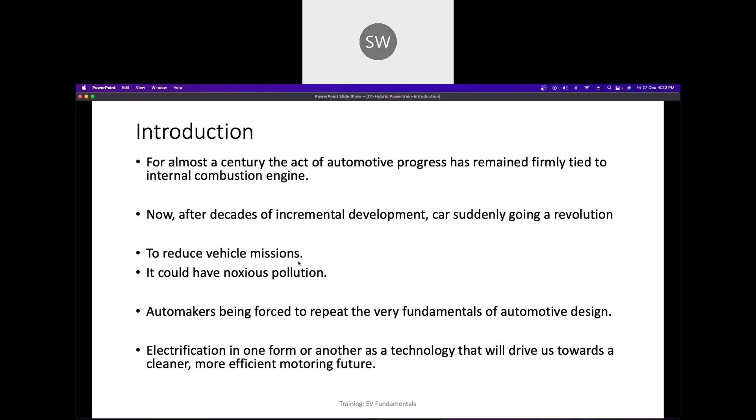We all know Tesla's full electric vehicle solutions - a major player in the EV market, demonstrating the advantages of full electrification with high performance EVs like Model S or Model 3. With software solutions like AI and even quantum computing, there's a bright future for all these technologies and cutting-edge things.

Speaking about electric cars, I've tried to cover vehicles already in the Indian market, so we have at least a listing in mind to correlate what and how these things are internally different. Our main focus is hybrid powertrain, but before that, let's have a recapitulation and collect whatever fundamentals are essential to understand it.

These EVs have gained significant traction due to their environmentally friendly and cost-effective nature, like Tata Tiago, Kia, and BYD Atto 3. Across the globe, BYD is becoming a global player and a top player in EV manufacturing, even trying to challenge Tesla's EV development. Because of China's battery making technologies and recent trends, many auto manufacturers across China have grown to the extent that they now dominate electric markets.

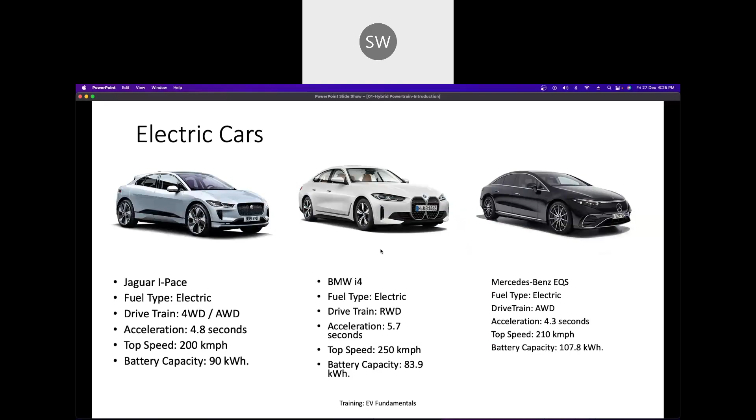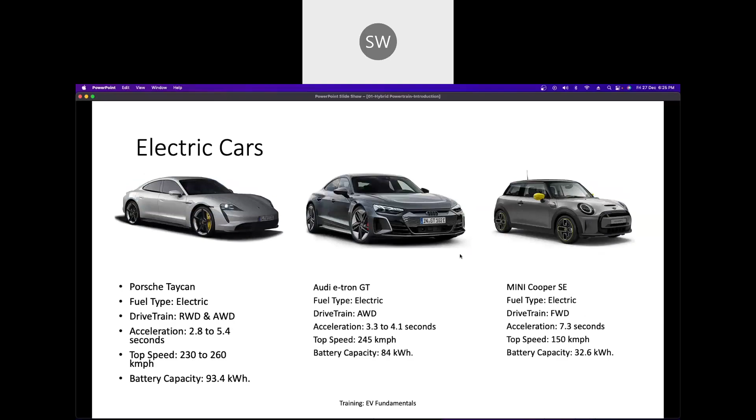Okay, so then BYD E6, so these are also available. Jaguar I-Pace, BMW i4, and Mercedes EQS. So all these are a list of electric vehicles. Some of these are into the sports segment, Porsche Taycan, and even Mini Cooper. Perhaps some of us already know these.

These are ranging from luxurious solutions to available, quite popular, even low price segments into Indian markets. If we talk about hybrid, and the term hybrid itself, so basically these are the things which we need to remember.

So EVs, or electrically chargeable vehicles, are powered fully or partially based on batteries, and they run completely on batteries - what we call pure electric vehicles. They have only one prime mover, which is basically a battery, and sometimes another version which we say is like a range extender. REX is the typical term given, for example BMW i3 REX, which is an example of a range-extended hybrid.

Apart from that, we know plug-in hybrid vehicles basically have gasoline engines serving as a backup power source once the electric battery is depleted. There are even algorithms currently changing this scenario and making it more profitable, and in recent years it will be very interesting and intriguing to understand which way this technology is going to change, and we are going to witness those changes.

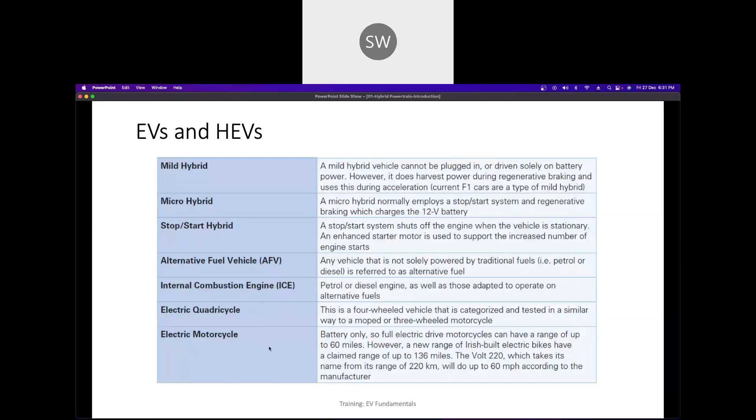So those are possible things with internal combustion engines, electric quadricycles, motorcycles and all. We have seen this trend in the market: whatever technologies earlier used to be for sports vehicles came into luxury vehicles, then those luxury vehicles became common passenger cars, and then it boiled down to motorcycles. So now these days we also see motorcycles basically driven by EVs and all.

About degree of electrification, electrification in vehicles varies from micro hybrids, or mild hybrid (MHEV), to completely electric ones. So in that range, like full hybrids, pure EVs and all, we can say these are the steps.

Micro hybrid typically offers start-stop functionalities at traffic signals and all, which depletes some fuel consumption rate, so that way relatively environmental friendly we can say. Full hybrid vehicles combine an electric motor and IC engine to work together for optimal performance and efficiency.

Even Mercedes-Benz offers C-class vehicles using this micro hybrid technology, wherein start-stop functionalities are featured to conserve fuel by turning off the engine when the car is in idle mode.

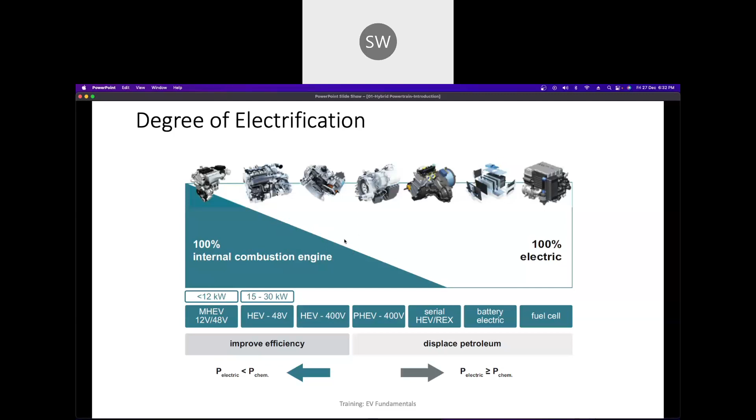These days artificial intelligence is also playing a crucial role into it, based on energy management systems. Hereafter once we speak about V2X and vehicle communication, it may be more intriguing to look for these technology clusters and how they are providing solutions to it.

Earlier there were few vehicles from luxury segments as well as from Toyota manufacturers who catered solutions into this micro hybrid and mild hybrid segment. Then between 2000 to 2010 we had the Corolla or Camry and those kind of vehicles, wherein full hybrid technology was already established and giving good results and outcomes as expected towards energy conservation.

Then this trend started especially after the pandemic, or near before the pandemic, wherein plug-in hybrids became a topic of cutting-edge technology, and every country started to basically forecast like after 2035. That is the practice, and they are still going to follow it across Europe.

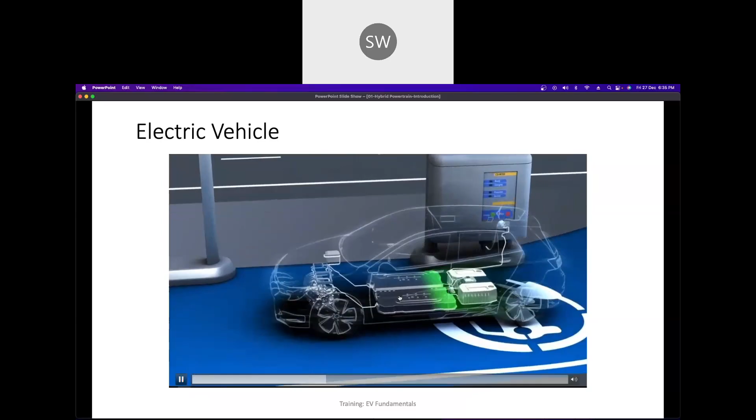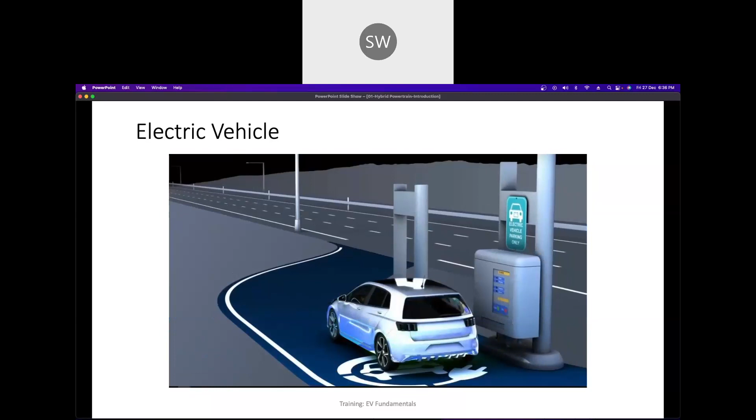Of course, a battery slowly will get charged, and that will drive the power towards traction motors, which will provide a traction force to the vehicle and be a prime mover, perhaps we can say. This white box may consist of range extenders as a blend of IC engine and all that. So this is what in general EV infrastructure, the charging station and all, would be.

This infrastructure development is still a problem even in developed countries like US and Europe. There the technology is still in question, and that's the reason it is getting prolonged.

Otherwise, yeah, we would have stuck to those deadlines of about 2030 for full EVs and all. So what are the additional offerings from electrification technology? Basically, it is silent mode and instant power delivery. Even in China, if you look at Xiaomi's and NIO's development, and even Dongfeng, the way they have catered solutions, especially instant power at the start, is amazing, and that's why it is still impressing people to go for EV technology.

And all this, of course, without any vibrations. So dazzling performance. That means reduced moving parts because there is no IC engine and its vibrating parts. Even though in range extenders there is, it will not hamper performance that much. So power will be less, I meant. So from micro hybrid to range extended ones, this is how the vehicles will be categorized: micro hybrid, mild, full, plug-in, and range extended plug-in electric. These two are pure electric EVs, what we say.

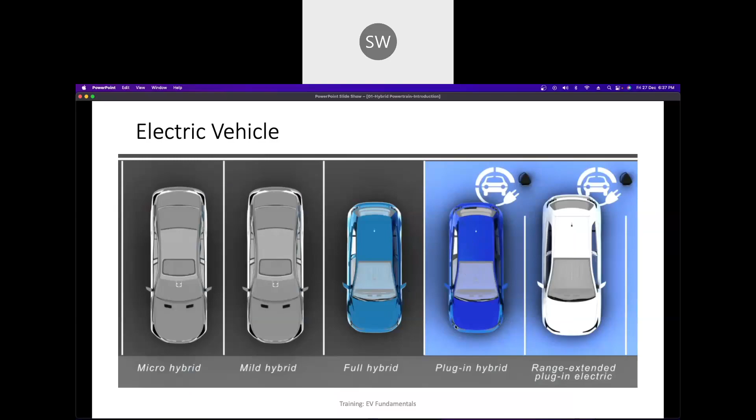So what functionalities do they offer? These are features: start-stop functionality. Of course, every segment offers that because we are discussing hybrids, and that's the term. It assists at the start, and the moment the vehicle is stopped at the signal, it assists again to generate sufficient torque at the beginning to move the vehicle. Okay, regenerative braking. That means some power is recovered from braking, which we otherwise lose in the form of heat. So instead of that, it is possible to recover that power.

In micro hybrid, it is possible. It's not promised by all manufacturers, but most of the manufacturers do it. And hereafter, from mild to pure EV, yes, it is there. Boost, especially during acceleration mode. For example, consider hilly terrain, wherein we need support or extra acceleration. That boost is not available in micro hybrid because of the battery structure and architecture of the micro hybrid vehicle. But for all others, it is possible.

Electric only mode is of course not possible till this particular segment. Full hybrid, yes, it is possible, but again, not promised by all full hybrid vehicles. Plug-in hybrids, yes, it is possible. Electric range, of course, no range, because pure electrification has not happened, and we are not considering the electric battery as the only prime mover here. Here it is possible, but only in a few segments.

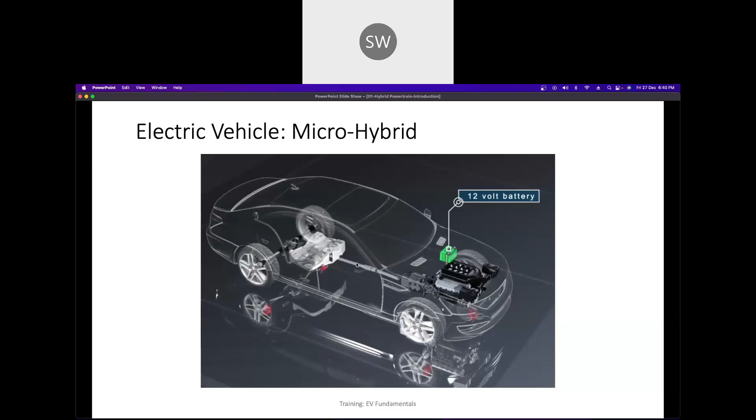They do not need any plug-ins. Their battery is charged during driving. There are a few evolving developments in this segment again. Every manufacturer has to segment out its vehicles so that it can play a crucial role in the market.

For mild hybrids, there would be the additional difference of a 48-volt battery architecture along with 12 volt. Usually, a mild hybrid will keep both batteries. They preserve the 12-volt battery architecture, and in addition provide this 48 volt. But it's considered to be near 60 volts, which is considered the danger point and needs to be catered differently. So there are safety protocols across the globe that every auto manufacturer has to follow.

So this is powered by a 48-volt battery system to assist the IC engine. But unlike full hybrids, they cannot operate solely in electric mode. That's again a difference between this and full hybrid.

Okay, so here the 48-volt battery is the difference between micro and mild, and here the battery as the prime mover is not possible in mild hybrid, which is possible in full hybrid. So again, they primarily use electric power for starting and accelerating, so that push is possible. We can see fuel consumption gains of 8 to 15%. That is what most of the manufacturers promise.

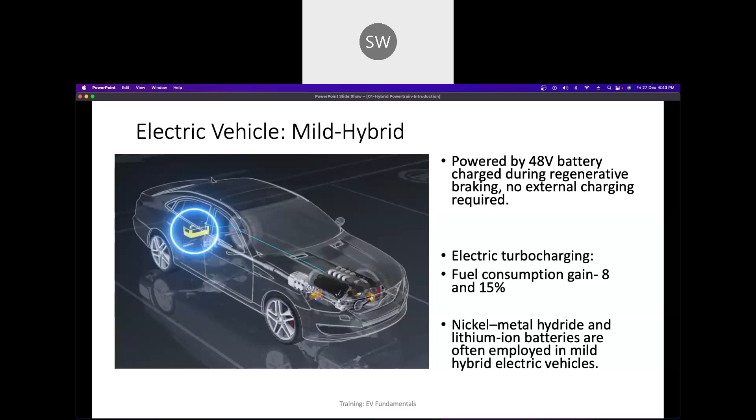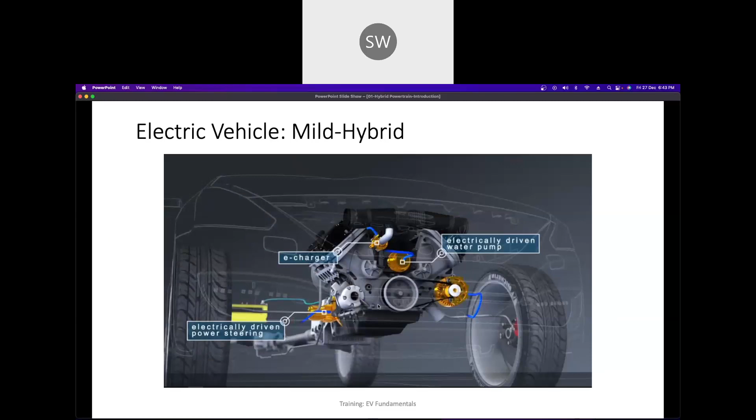So these are supportive functionalities, e-charger. Of course, what I was talking about, the electrically driven water pump. This system is basically for the cooler and all. Then there would be assistance, especially push support technology, and again power steering. So these functionalities will be taken care of by the battery in mild hybrid vehicles, not driven by IC engines as in conventional vehicles. The yellow highlighted parts are driven or powered by batteries rather than the IC engine. Okay, so that is how hybrid and degree of hybrid, I guess, we can understand now.

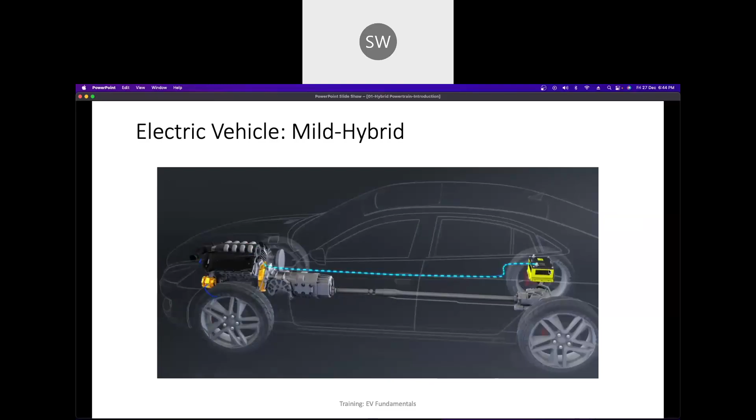So here we can see a torque converter. The pump pumps the fluid into the torque converter. This is considered to be a complex device. I can understand, because it's not so intuitive, and one needs to imagine the fluid flow and all. It's quite an intricate device, I would say. But in mild hybrid it is there, and the oil into it is now taken care of by the battery, no more power required from the IC engine.

Full hybrid, of course, has a small battery architecture. Again, what small means, and all these norms, differ from manufacturer to manufacturer. Toyota Highlander, if you have seen that vehicle, is a hybrid. Even Prius or Camry, these are full hybrid vehicles, well established in the market. And there are a few from the luxury segments like Mercedes and BMW as well. This is what in general the technology will look like.

So it will have two motor sets, MG1 and MG2 in short form, which we will be looking at in the second presentation, all the components. Full hybrid has an IC engine as well as battery packs, and since it has the capability to power the vehicle purely on battery, it requires electric motors. In between these two motors sits a transmission, which I'll be sharing and discussing.

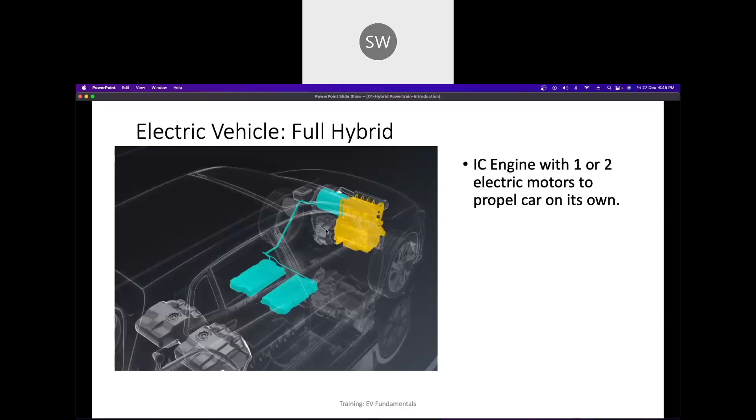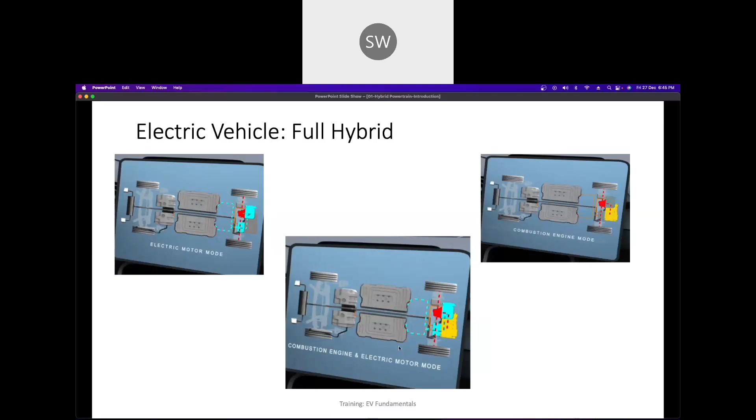So these are different modes, combustion engine and electric. Power can be taken from both sources combined, or either of the sources: pure EV, combination, or pure IC engine. All these three modes are possible in full hybrid vehicles. So of course, fuel savings, emission norms and all. It's like 20 to 50% efficiency gains over standard petrol and diesel conventional vehicles.

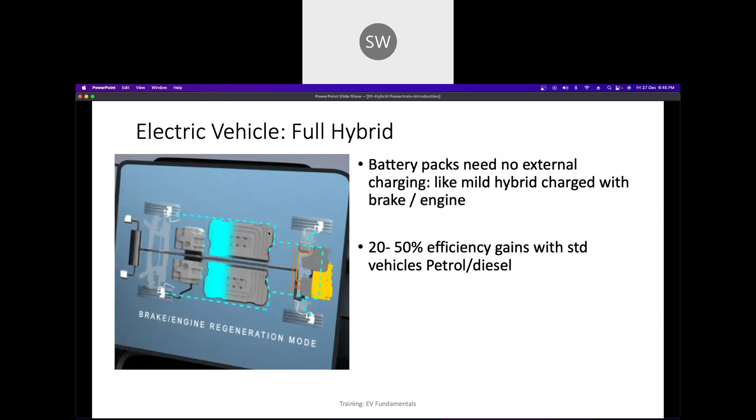So here comes plug-in hybrid, which requires extra charging from an outside source because of the power or voltage depletion in the battery packs. It can operate solely on electric power for short distances. They also have gasoline engines to extend their range, which we call a range extender. So that option is there.

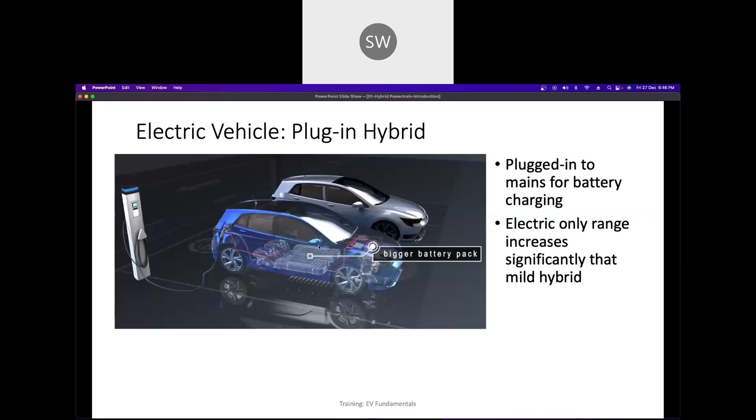But some vehicles have no ICE engine, like Tata Nexon, perhaps, you know. That vehicle is pure EV, no internal combustion engine as such. But range extended, we know the consequences of pure EVs and plug-in hybrids. Here the additional power can be sourced from the internal combustion engine. That's why the term is range extender.

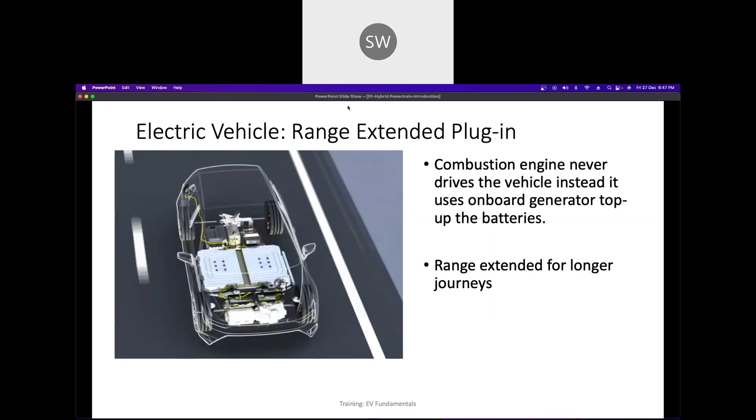So this is what the internal combustion engine and its architecture would be. There will be a lot of control units and processors or microcontrollers communicating with the mainframe ECU, for each and every technology.

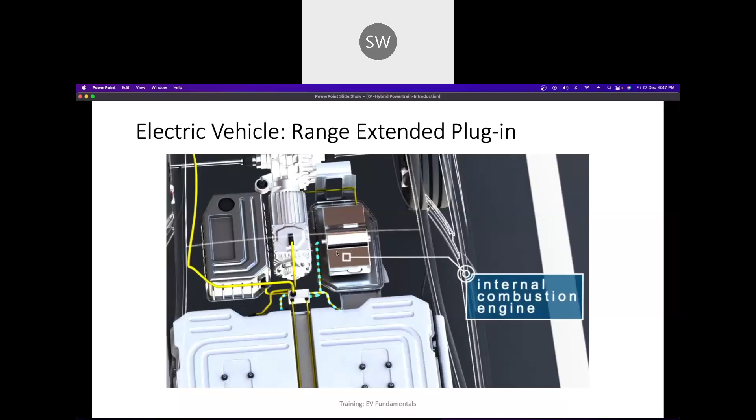I would say there are a lot of engineers who are working on the logics, and you'll be surprised, we are even getting customer queries on Audis and BMWs and even Rolls Royce. So in peculiar functions, though almost all operations are addressed, there will be some scenarios and test cases wherein, however sound you make your technology, there will still be quite a bit of room to develop these parts. So in combination, it would be very tricky.

So these are terms which are used in degree of electrification. Apart from these fuels, we are not going to go into the chemistry involved in those fuels. But this is, entirely from the mechanical perspective or architecture-wise, how the hybrids would look. There is something called parallel hybrid technology, serial hybrid technology, and power split. I know Toyota has its own peculiar power split vehicle. Each manufacturer has its own trends towards hybrid power generation.

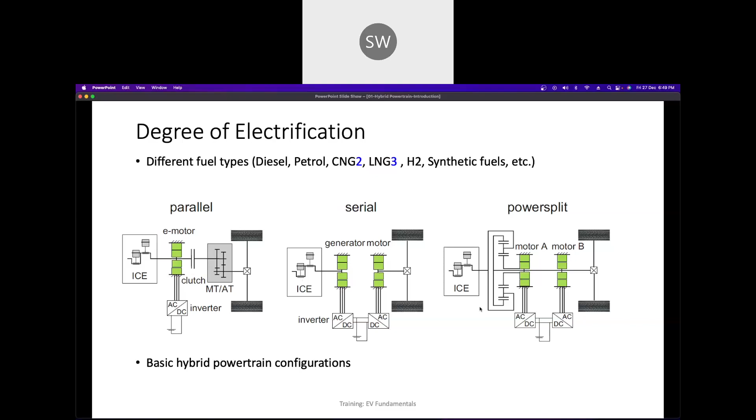So either purely based on motors, or IC engine as a support, or the IC engine is driving a generator motor, as you can see here, and then from that an AC/DC converter. We will be discussing this part next. So that is what a serial hybrid means: these two are connected in series. And power split basically means power from the IC engine as well as from each of the motors is possible, in short. And this is the parallel hybrid architecture.

Again, there are few options. Usually the degree of parallelization has these terms: P0, P1, P2, P2.5, P3, and P4. That's why it's very tricky to speak about vehicles and what kind of technology they are using. P0 is basically integrated at the front end, via a belt, so power is given just at start and stop. P1 is the E drive power from the battery or the motor, supporting the engine and transmission in between.

P2 is also that, but after the clutch plate. That's the difference. P2.5 is at the transmission inlet side, so it can push it. P3 is another level of hybridization, integrated with the transmission, meaning battery power is integrated with the transmission. And P4 is for four-wheel or all-wheel drives, where in addition the axle is supported, so the rear wheels are also supported.

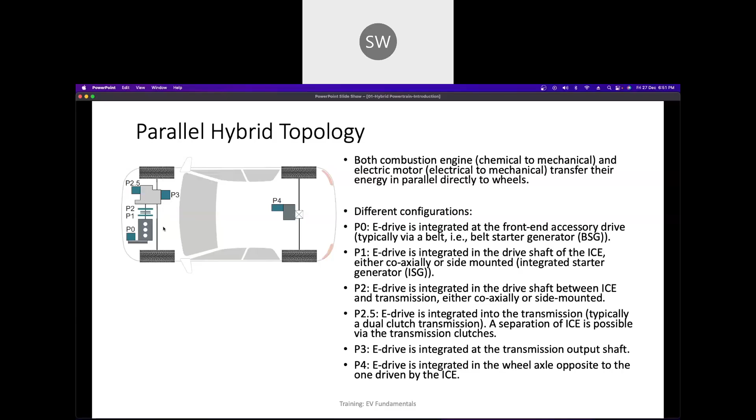But perhaps almost every one of us knows the most common segment is front-driven wheels. That is the common architecture most passenger cars use because of fewer components, it's easy to control, and to keep track of oversteering and understeering, if you know the terms. Apart from that, this is about serial hybrid technology and the terms related to it. It's the same part we spoke about earlier in the introduction: power split technology.

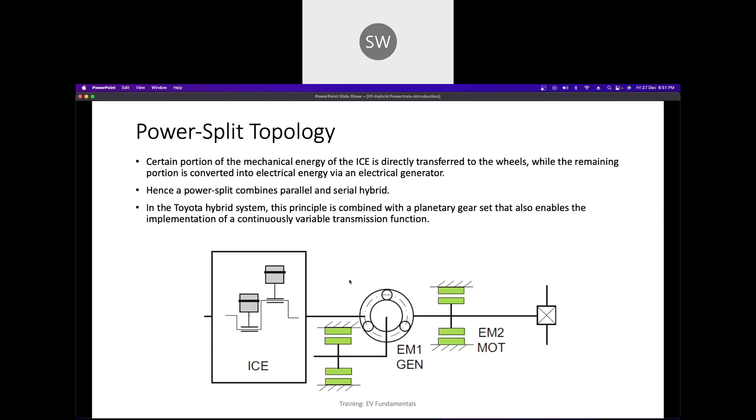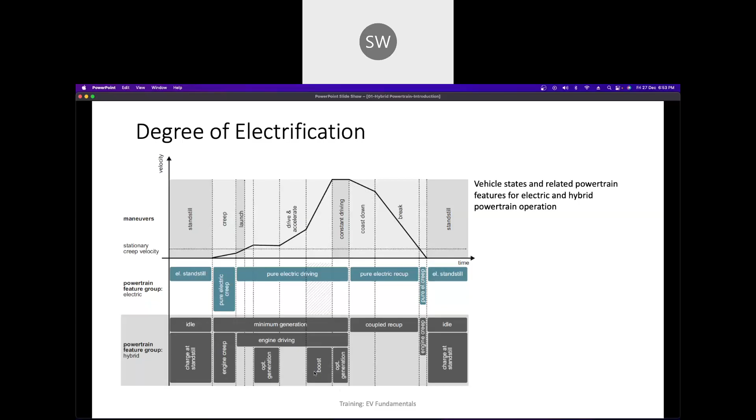Then coast down, so basically we are decelerating, but the vehicle, because of its inertia, is running. And this is like brake, so we are reducing the speed. And then standstill means again we are at stop. So these functionalities, how basically in different segments of hybrid vehicles they are supported, that is what is listed.

Yeah, so that was the first part of our presentation. I would go for the second part, which is more into components and all. So just let me share that part again. So this is from the perspective of the components which are present in the hybrid powertrain. So I can skip this.

So we already have discussed the benefits of hybridization of vehicles, fuel consumption, acceleration, and also this part we have discussed. Maybe Toyota Prius we can speak about as an example, which became synonymous with hybrid technology, particularly in cities like Tokyo, which are well developed, where efficiency and reduced emissions are key. So it has grown popularity in emerging markets. Even in India we know this technology is coming up.

Then there are predictive maintenance systems. Perhaps hereafter some AI-driven technologies will definitely come into it, which will work towards efficient maintenance, efficient repairs and all. Even suggestions would be done through some AI techniques. Of course, there are a few models which need to be trained on that, but yeah, it will work.

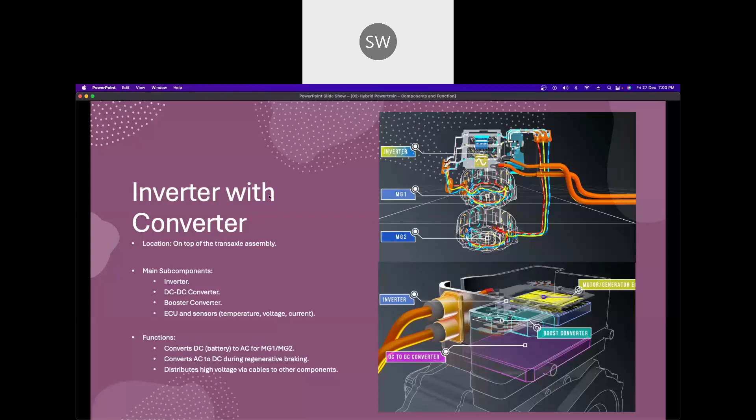For these DC-DC converters, as I spoke about, it steps the high voltage DC down to the standard 12 volt system, which is demonstrated here, from the battery. That is needed because each and every electronic component has some threshold and working voltage range where it is most efficient. So that is one of the goals of this DC-DC converter.

This maintains full operational voltage and current to the 12 volt system, including charging the auxiliary 12 volt battery, as typically there is no conventional alternator installed in full hybrid electric vehicles. This DC-DC charger is rated to a certain amperage and output depending on the requirement of the electrical and low voltage consumers installed. It can also be combined with the converter assembly or installed directly onto high voltage battery packs.

Again, there would be various sensors in the inverter and converter assembly monitoring atmospheric pressure, temperatures, and powertrain components. So overall, it steps down high voltage DC to the 12 volt system, powering low voltage systems like lighting and infotainment. It even charges the auxiliary 12 volt battery, eliminating the need for an alternator in the hybrid. That is a crucial task which the DC-DC converter does.

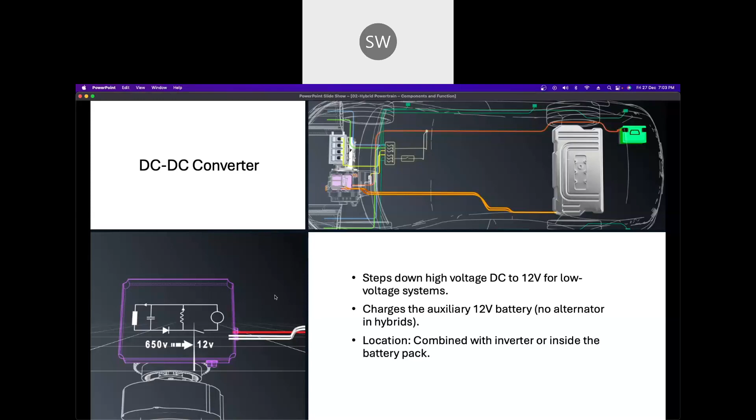Even for that DC-DC, basically... Swapnil sir, I think you are on mute. Kindly unmute. I don't know, somebody might have muted because of disturbance.

Sorry, I will cover this booster converter again. Basically, it steps up or steps down voltage as required, enhancing the hybrid system's adaptability. It maximizes the voltages of the MGs and manages battery charging during operation. The booster converter is connected to the inverter, and its main task is stepping up or boosting the normal high voltage from the high voltage battery pack to any voltage level up to the maximum high voltage rating predetermined by the manufacturer.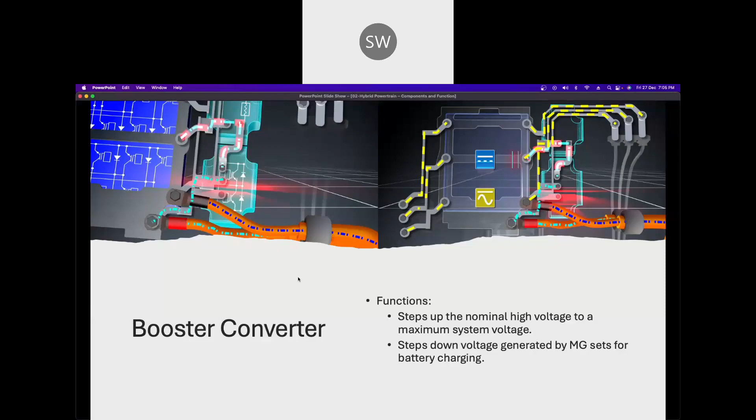That is when the powertrain system requires it, and the booster converter also steps down the high voltage generated by the motor generator MG sets to the nominal high voltage charging rate for the high voltage battery packs. So these are the two main functions of the booster converter, step up or step down. That's why the term is booster. About mechanical driving units, we are speaking about plug-in hybrids, so naturally there would be these components. But these days manufacturers choose wisely to optimize the number of components.

So the mechanical drive units basically use compound planetary gear set systems, to connect and disconnect the IC engine with the motor generator sets, MG1 and MG2, providing variable ratio and torque multiplication, depending on the gear ratios. This is a peculiarity of each manufacturer as to which ratios can be achieved. For our ZF part, I know only 4 planetary gear sets are able to make 8 combinations of gear, so 8-speed gear train, based on different combinations we can generate.

That's why people prefer to get attached with this, and their linearity as well, easy to adapt with the rotations, and that capability also enhances the power transmission part. So these are basically used in hybrid electric vehicles, and that of course varies in design as per manufacturer.

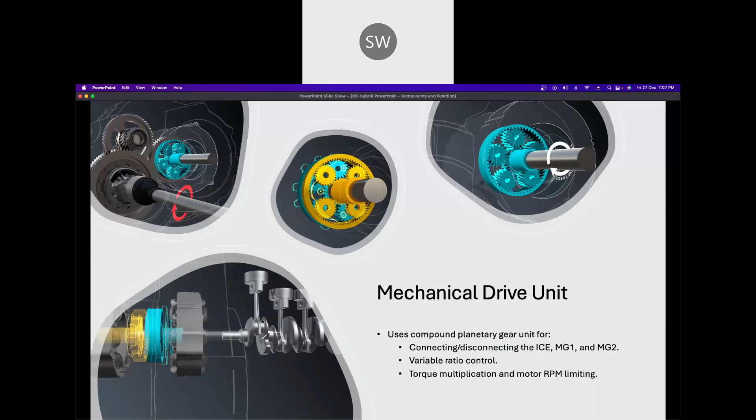That is a primary part, one of the primary parts. It provides variable ratio as I've stated. The drive unit is also used for motor RPM limiting, so that if the power demand is less and the motor generator set is already transferring higher RPM, step down is also possible with this gear ratio, controlled by the main ECU for the hybrid electric powertrain. That is comprehensively managed and controlled by the hybrid powertrain systems. The ECU gets inputs from different sensors and other ECUs in communication, monitors requests and calculates the required torque and power, and that's how torque multiplication and limiting will be taken care of.

About these motor generator sets 1 and 2 - there are various configurations of electric motors and generators in use by hybrid electric vehicle manufacturers, quite vast. Typically there would be MGs, motor generator components, used to provide mechanical rotational forces as well as to generate the voltage and current needed to recharge the high voltage battery packs. The two main components that make up these units are the wire wound stator part and the rotor part, and there are different types into it.

With a typical two motor generator powertrain, MG1 is used as the main high voltage generating device as well as starting the internal combustion engine - that is the goal of MG1 usually. The second, MG2, is the main motive force driver for the drive wheels. It is powered either by MG1 or by the high voltage battery packs via inverter and converter. With the assembly, it can be used for regenerative braking, by turning into a generator when the driver begins the vehicle's braking action. That is one of the parts usually handled by MG2 - so these are two different devices.

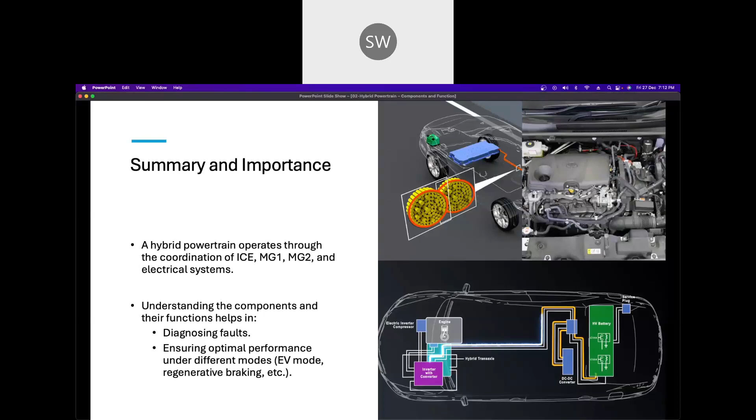Let us talk about different system modes now so we can understand it in more depth. It would be intriguing to understand the different modes. Our hybrid powertrain caters to these different modes, and as the demand for electrified vehicles continues to rise, understanding these modes is essential, both from a designing perspective for the algorithms and from a learning perspective.

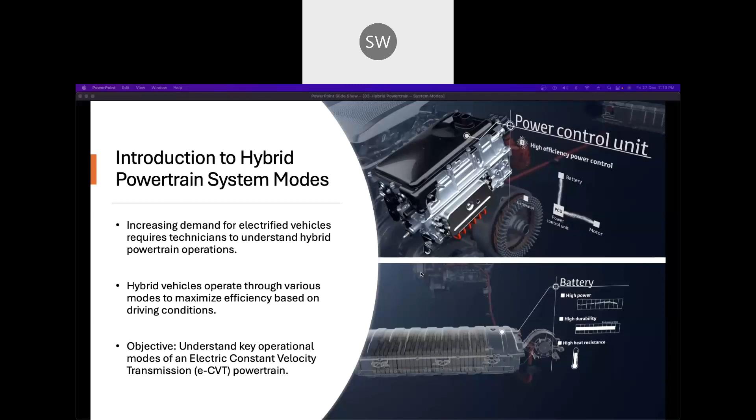Basically these vehicles operate through a series of modes to achieve maximum efficiency based on varying driving conditions. This will focus on how the electric constant velocity transmission, ECVT, plays a role in the powertrain, and is a central part of the vehicle architecture. These hybrid powertrains are adjusted based on driving needs, with more focus on fuel efficiency, and that is what we are going to address.

So for different modes, let us start with the easiest mode, which is light mode, standing start. So what exactly happens: at light load, when the vehicle is starting from standstill, the hybrid powertrain utilizes the electric motor MG2. Of course different manufacturers use different strategies, but conventionally most manufacturers do follow this.

MG2 is the sole driving force, so power flows from the high voltage battery to the inverter and then to MG2, and that is how it propels the vehicle. If torque demand increases, the internal combustion engine becomes activated through MG1, adding additional power to assist MG2. That is the basic idea for light load standing start conditions.

So the power flow is from high voltage battery to inverter to MG2 to compound gear set and to final drive, and then basically to the wheels.

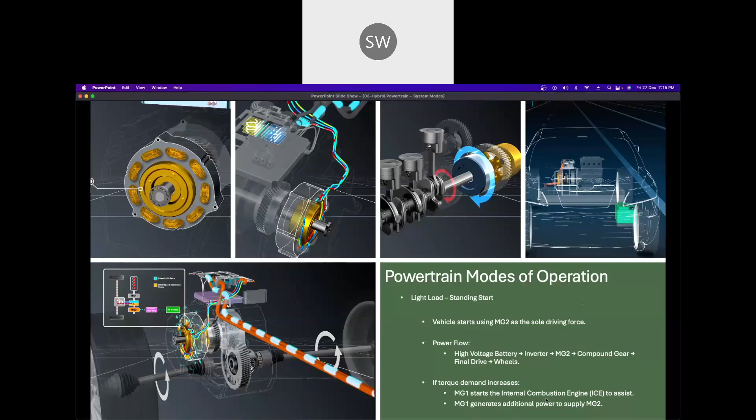Again with different conditions, if torque demand increases, there is a scale. MG1 starts the internal combustion engine to assist, and then MG1 generates additional power for MG2. So that is what light load constant standing start is.

Now this is the next phase, light constant load, but the speed is already there - vehicle traveling at medium speed driving. In this mode, the vehicle operates at medium speed with a constant load, such as cruising on highways with no hilly terrains, so it's at a constant rate with no slopes perhaps.

The IC engine provides torque to power the vehicle, while MG1 helps recharge the battery via the planetary gear set. That is the typical mode.

If the battery's state of charge, the SOC term you might have heard of in these workshops, is low, then MG1's RPM is increased to prioritize charging in that case.

So this is MG2, and MG1 would be here. Depending on the state of charge, it would try to optimize it. All these decisions need to be wisely considered while designing the codes and algorithms for decision-making in the ECUs and BMS systems, BMS ECUs and all - that is sometimes very challenging. So the power flow is from the IC engine to the planetary gear set and MG1.

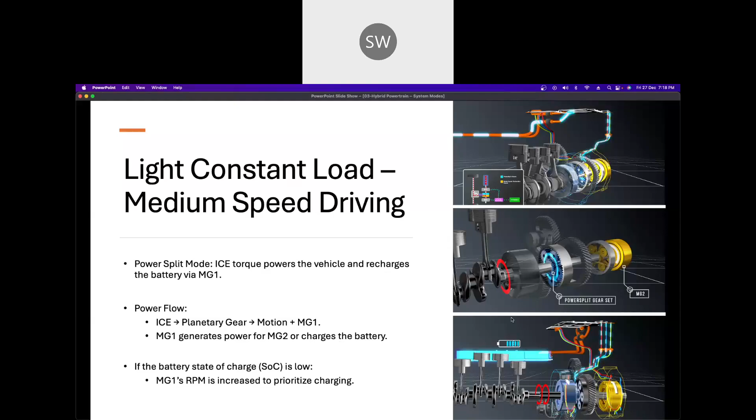Depending on the levels of ADAS, this behavior could be further changed. For high acceleration, which is a power demanding mode, when the vehicle requires rapid acceleration such as overtaking or sudden speed changes, the system enters heavy load mode. In this mode, MG2 operates at maximum output to provide rapid torque delivery. Priority is torque in this case, not charging of the battery.

Then the IC engine assists, engaging through the compound gear unit, while MG1 generates additional power for MG2 and maintains optimum performance. All this is driven through the control unit. This is essential for high performance driving situations where both speed and efficiency are crucial. This system ensures MG2 delivers maximum torque while minimizing reliance on the IC engine, to improve fuel efficiency further. That can be one of the scenarios.

Even the Porsche Panamera E-hybrid vehicle, since Porsche makes sports segment cars and is popular for that, utilizes this mode to deliver exceptional acceleration while maintaining fuel efficiency.

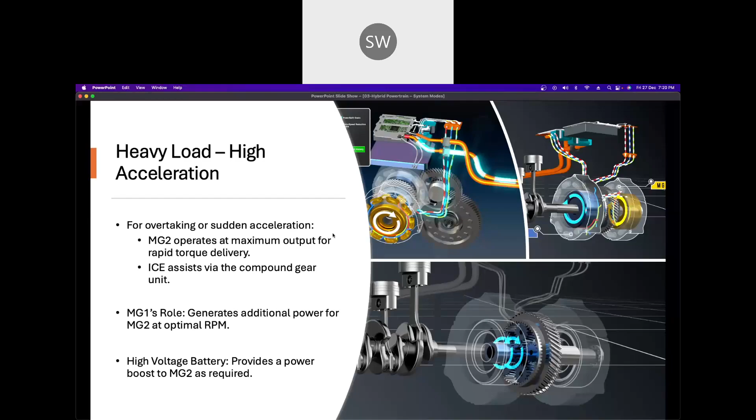Deceleration or regenerative braking mode of operation: during deceleration, the system enters regenerative braking mode. The IC engine turns off and the wheels transfer mechanical energy to MG2, which functions as a generator. This allows rapid battery charging, reduces wear on hydraulic brakes, and generates deceleration force. To prevent overspeeding of MG2 and the gear units, the IC engine may start to stabilize RPM, since in deceleration mode, to reduce traction force or transfer force to the wheels, it may come in between.

Reverse mode is also important, as sometimes more torque is required in this mode. In reverse mode, the system operates in reverse polarity through MG2, allowing the vehicle to move backward without requiring additional gearing. The IC engine remains off during reverse motion, and MG1 rotates freely without generating power. The Nissan Leaf uses a simple and efficient reversing mode mechanism to provide smooth backward motion without needing a separate reverse gear mechanism. That's one of the cutting edge technologies these vehicles use.

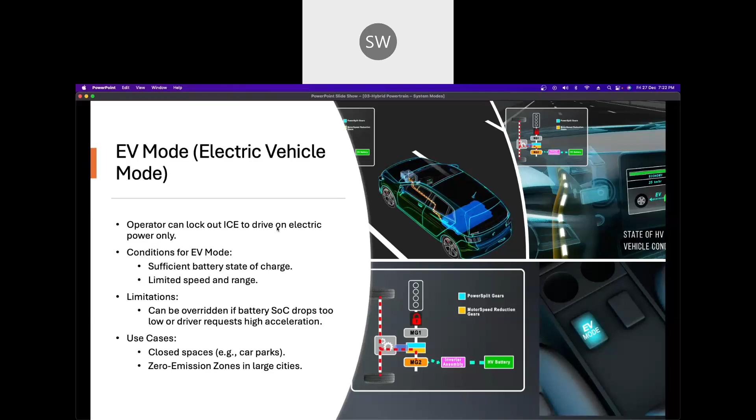So, summary of all the operations: we discussed hybrid powertrains which utilize various operational modes, optimizing energy use across different driving conditions, like high load, light load, constant load, heavy acceleration, regenerative braking, reverse mode, and EV mode. Each mode is designed to deliver the most efficient power contribution. These are typical use cases, broadly listed, though when we go for code generation, the system architecture design would be different.

So then there are a few mechanical challenges I would just quickly touch upon, which are essential for EVs, especially while handling the components and all. I don't want to go into much detail about that, but yeah,

hybrid vehicles, similar to traditional internal combustion engines, do have these components. So they are identical in most ways, but come with unique mechanical challenges that require special knowledge and diagnostic procedures, and again challenges from the integration of high voltage systems. That is also there, along with mechanical wear and tear, oil lubrication issues, and the overall complexity of the hybrid powertrain architecture, I would say. So these are basically the key challenges.

So speaking about safety considerations, I have already stated above 650 volts or 60 volts, whatever it comes, it has to be catered to with much more safety priority. So there would be separate standards followed for functional safety as well as user safety. It's top priority in hybrid vehicles, of course, due to the presence of live high voltage systems and powerful magnetic fields.

So even technicians are required to follow strict safety protocols to avoid exposure to dangerous voltage or electrical faults. So that is quite a challenging part for maintenance as well as the EV's life, or even these hybrid vehicles' life.

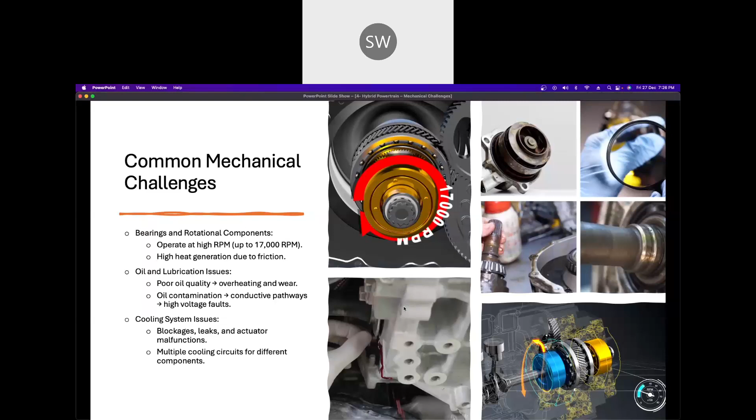From the lubrication side, they recommend going with only certified coolants and certified fluids because of the peculiarity in the component design. So proper lubrication in critical hybrid vehicles will ensure smooth operation and prevent mechanical failures. So that is also essential.

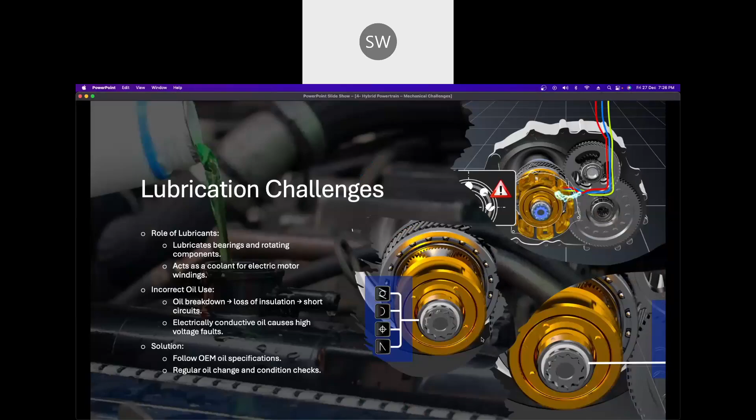For cooling systems, thermal management systems are there for multiple components, but of course those need to be triggered smartly, which can optimize the performance of the IC engine, electric motor, battery, inverter, and all. So those are also primary parts of these cooling systems.

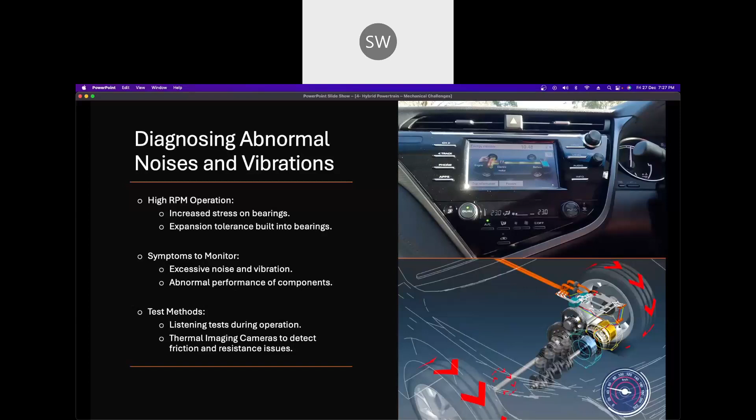Since we still have the IC engine and its rotating components, the noise and vibration analysis is also challenging in the presence of high electric and magnetic fields especially. So that is also one of the challenges, I would say, for vehicle design. For the high voltage component system, we spoke about specific accessories required from the maintenance perspective, like to prevent stray currents through bearings. So it's basically a very challenging part.

So these are the challenges which we are listing. Fault replication and test drive, that is also monitoring for noise, vibration, and performance issues. So these are also a bit challenging.

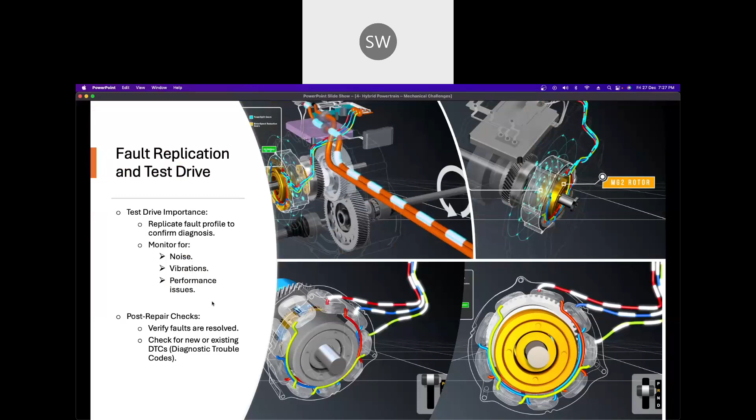So I will just quickly go through one of the important parts, maybe just 5 slides about the recent trends in lithium battery technologies, I would say. These are also becoming critical ones these days, because we know the entire war is about optimizing the technology of lithium.

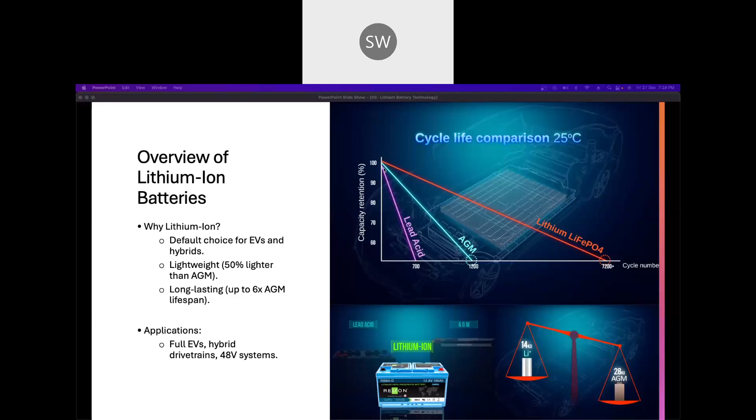If we look at the performance curve, even the number of cycles, of course it is providing advantages. Based on chemistry, there are three typically used compositions: LCO, lithium cobalt oxide, commonly used in mobile phones and laptops, whereas nickel manganese cobalt, and LTO, lithium titanate.

So these are favored because of their high energy density and fast charging capabilities for EVs. So I guess Tesla uses that NCA, nickel cobalt aluminum battery, which is a high performance battery, providing long battery life as well as high energy density.

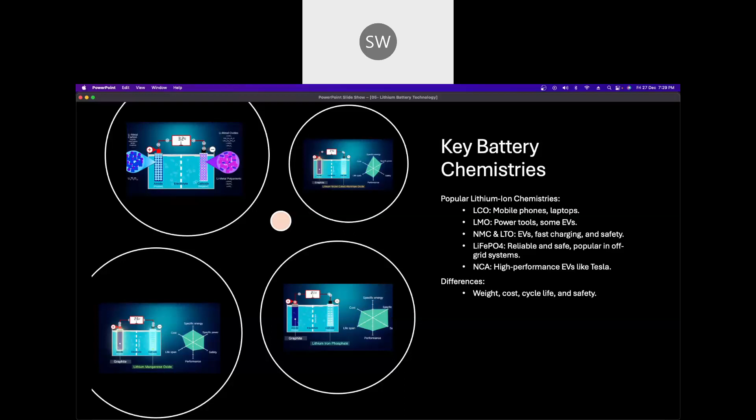So this particular unit is one module, and they have that modularized structure. But we cannot go on making it infinite in amount; of course it adds weight. In Tesla and those cars, the battery pack itself weighs somewhere in the range of 400 to 500 kgs. So that is huge in weight. That dead weight we are carrying of course increases the curb weight.

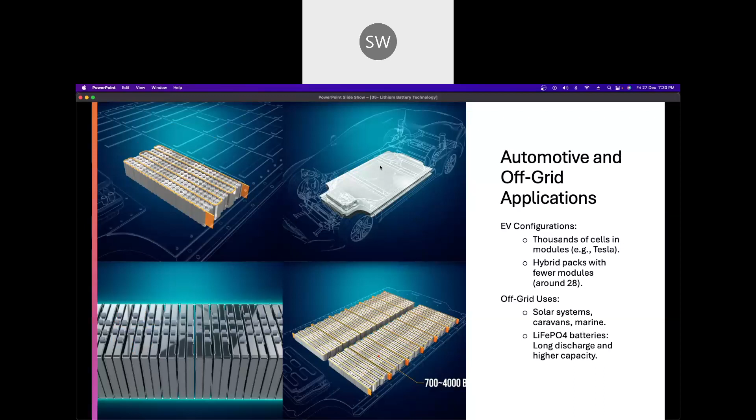Apart from that, battery management system and maintenance is also one of the essential parts for ensuring safety and efficiency in operations. So the BMS, battery management system, regulates the operating temperatures, voltages, charging rates, and so on for the safety and longevity of the battery. So these are some of the things.

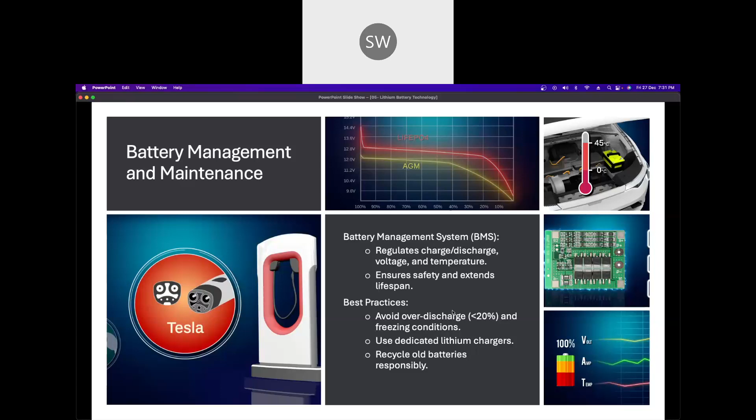Future trends: the global EV market is projected to account for 25 to 50% of all vehicle sales by 2030. So the growth is driving continuous advancements in battery chemistry and safety. Many companies have started tying up; Tesla is tying up with Google, IBM and others for quantum computing labs, to search for different possible solutions or alternatives in chemical arrangement or molecular structure, like solid state lithium batteries.

We have lithium sulfur and lithium air batteries, which is cutting edge technology in China. They are experimenting a lot with lithium iron phosphate based batteries. So that is basically it from the battery side. So just a last part, maybe 2 or 3 slides.

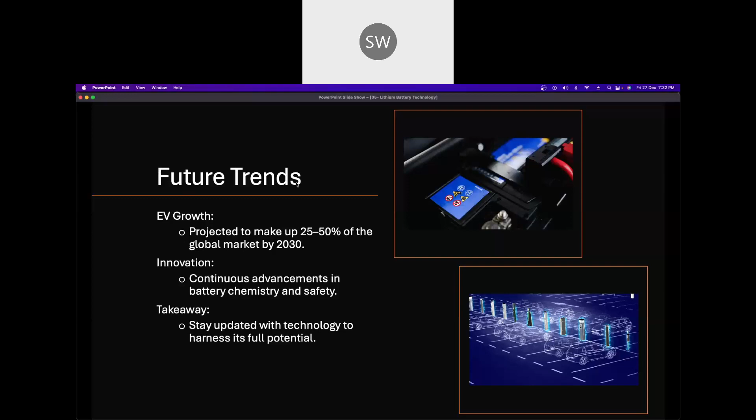This is about understanding the traction motor. This is important because in EVs it is considered to be the prime mover of our power in the powertrains. Since we are discussing hybrid technology and the driving part, that's why I'm introducing it. These are crucial components in EVs, providing the necessary power to drive wheels and axles.

There are different types: the AC induction motor, which can be used as a traction motor, permanent magnet PMSMs, BLDC brushless DC motors, and even SRMs. These are all possible solutions used as a traction motor. We also have our traction motor which does not use rare earth materials, which are basically used in permanent magnets. ZF has got a patent and an award for that, for saving the environment.

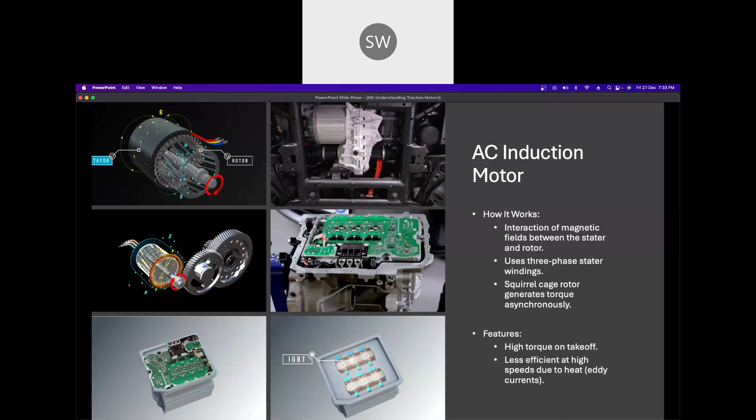Inside the traction motor, we have IGBTs which control the performance, the working principles and the working environment. So in general, that is the AC induction motor, and IGBTs are an inevitable part of it; basically they control and take decisions. The PMSM is characterized by permanent magnets, of course. It has a rotor and electromagnets in the stator.

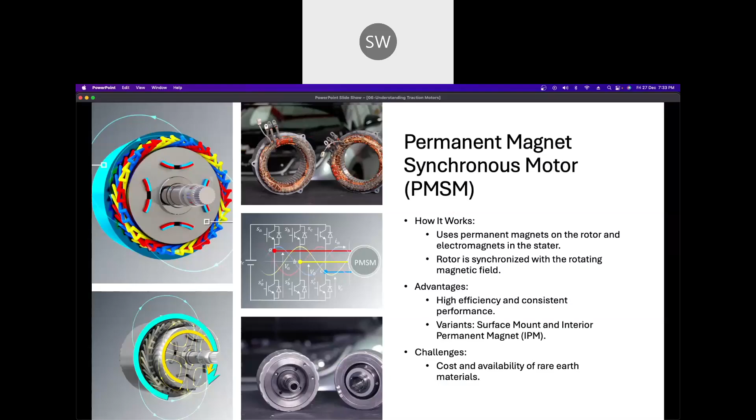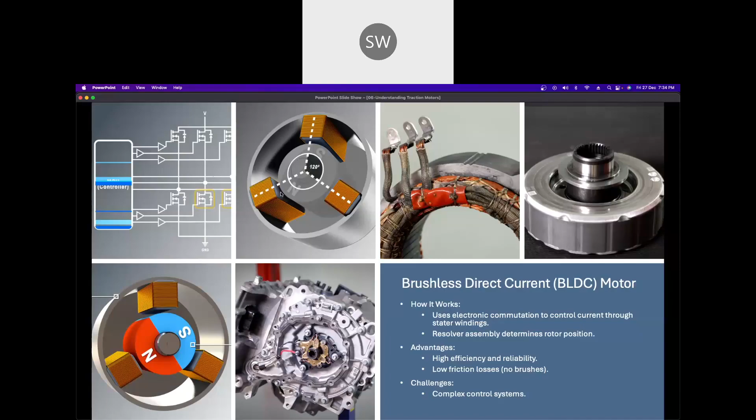Then BLDC. These are different configurations, but they use electronic commutation to control the current through the stator windings, and a resolver assembly determines the rotor position. These motors usually offer high efficiency and reliability with minimum friction because of the air gap. The SRM operates by minimum reluctance between stator and rotor poles through magnetic flux. These motors do not use windings or magnets on rotors, which makes them inexpensive and robust. But SRM struggles with lower torque at low speeds.

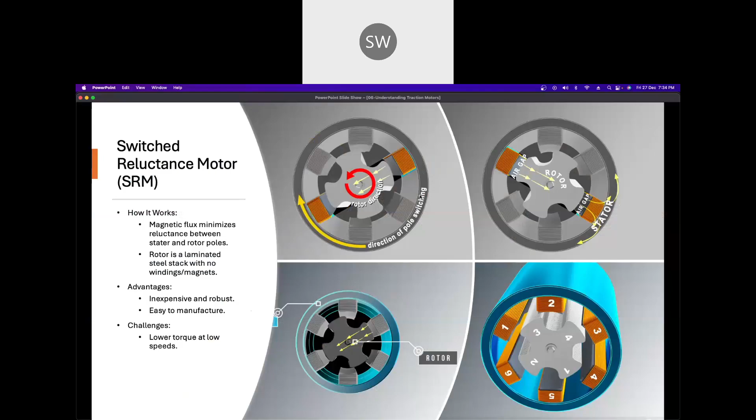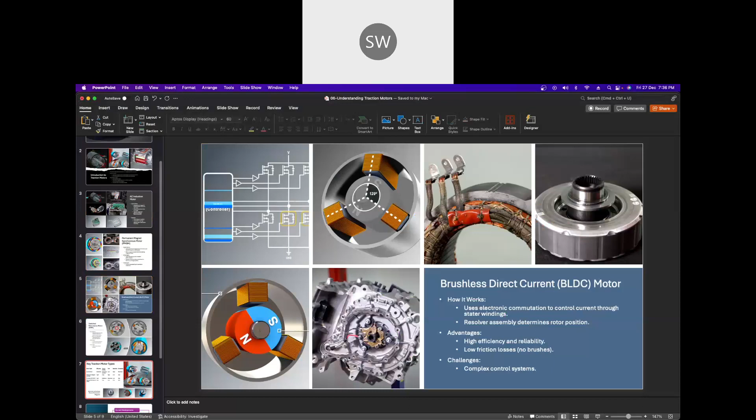No, there is no specific color coding as such. Some of the organizations do follow their own, but it's not the convention from the authoritative terms or something like that, which is not obligatory, I would say. Okay, thank you, sir.

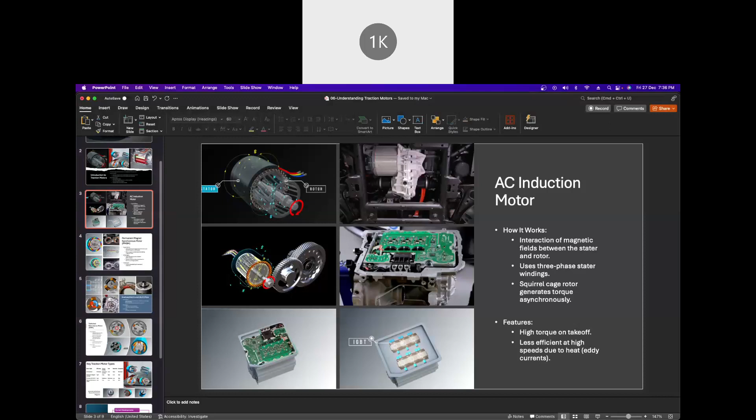Hello, sir. Hello. Yes, you are audible. Thanks for a very nice presentation, point by point. I would like to know one point.

Under HPT, there is hybrid powertrain. Which is the preferred motor out of AC induction, brushless, or permanent magnet and the like, for a given set of conditions and performance expectations? So you meant different types of motors? Out of the different options available for the hybridization aspect, which is the preferred motor?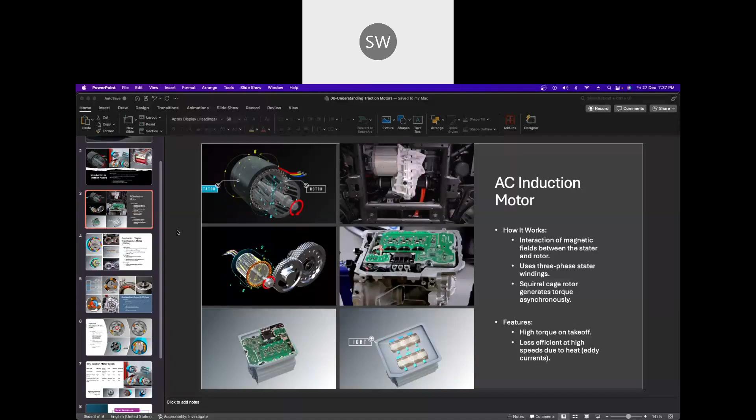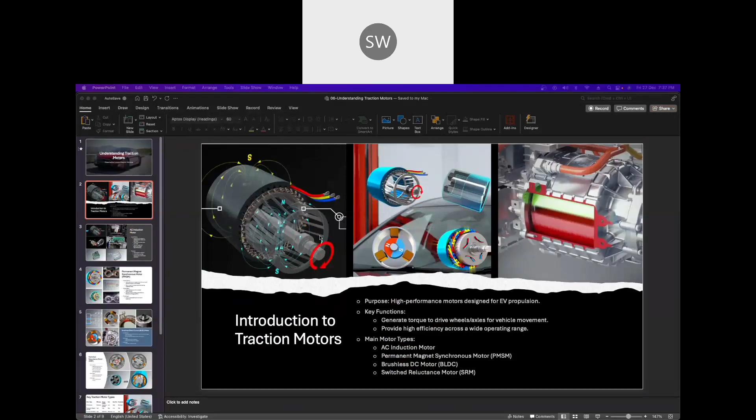Okay. The preferred one, I would say, all depends on the different demands and segments of the vehicle. It is really tricky to answer because for passenger cars and commercial vehicles it would be altogether different. There is no one-fit solution for all. It all depends on the OEMs, manufacturers, their segment of vehicle, and how the internal architecture is managed.

Thank you, sir. This was Maghonikar from this college. Okay, thank you for your question. One observation for the coordinators: I have put the question, but it is not visible. Only the name is visible. Understood, there seems to be some problem. Good evening, sir. Can I ask one question? Yes, sure.

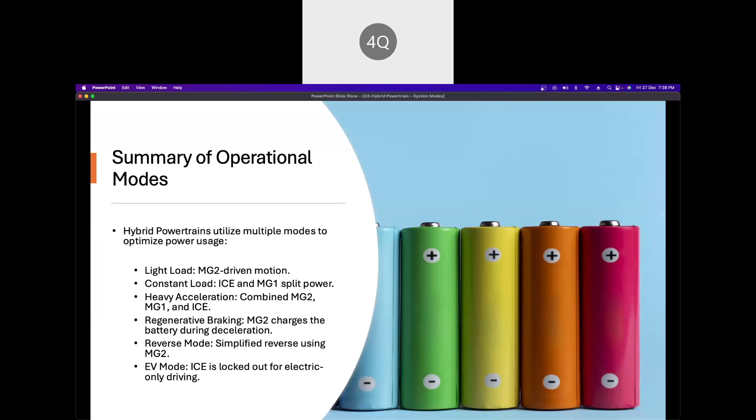Sir, you have given excellent topics on operating modes of EVs. My question is, in these operating modes, going forward and backward, is there any time duration? Okay, understood. It's a good question.

Basically the entire development, the entire ECU coding, is based on optimizing or minimizing the amount of time required. Usually we count that in milliseconds. As far as possible, it should take a few milliseconds to reverse the direction of flow from the prime mover and component side. If the shaft starts rotating in the adverse direction, that does not mean the wheel will immediately start rotating.

It will take some time because there is additional traction force as well as the weight of the vehicle already acting on it. There is a lot of force and weight on the wheel, and it has to tackle that. But it has to be in milliseconds.

Based on that, the luxury comfort and sports segments are classified. For sports segment vehicles like BMW and Porsche, it would be a few milliseconds, relatively less than other segments. But for Mercedes or some classes of Stellantis vehicles, it won't matter as much. Of course it has to be minimum, but not like the sports segment.

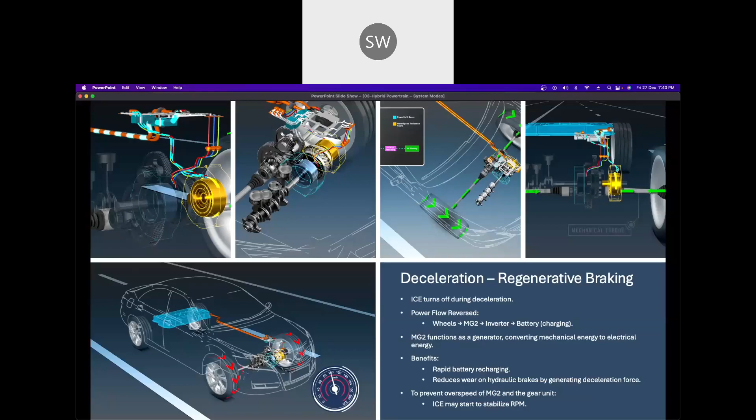Okay, sure. What is the difference among variable ratio control, torque multiplication, and gear system?